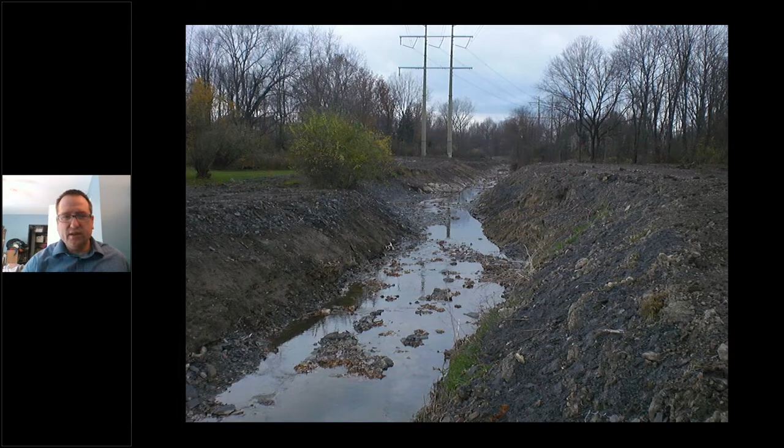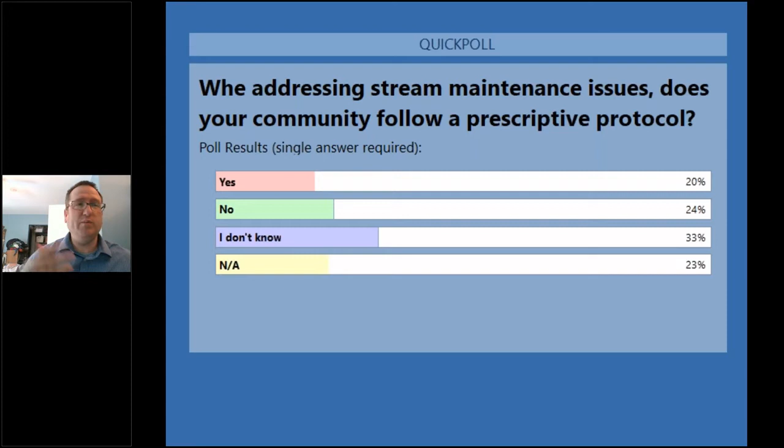One thing I just want to point out, if you are in Northeast Ohio, Cuyahoga County, and some of the neighboring communities, if you're in the service area of the Northeast Ohio Regional Sewer District, they may be handling these stream maintenance issues for you in some capacity as part of their stormwater program, but they won't necessarily handle everything in the communities. A lot of the headwater streams are still the responsibility of those communities.

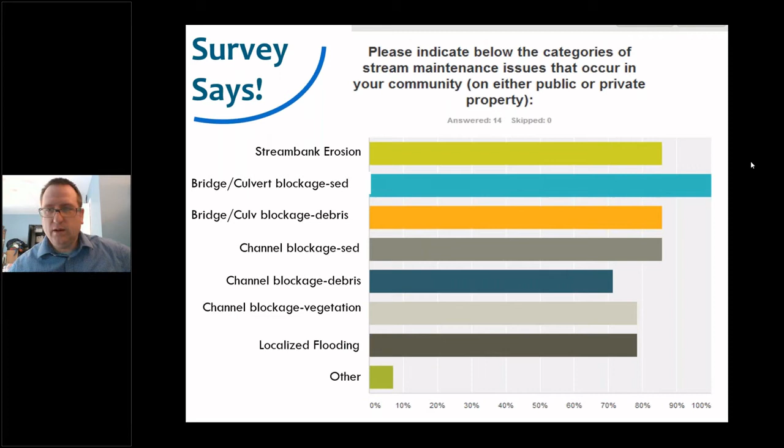What's your approach to stream maintenance or complaints on private property? That's a lot of the issue - many of these issues occur on private property, and that can be tricky for communities to handle. About two-thirds said it was a property owner responsibility. I like that - I think that would make everybody here happy. None said it was the community's responsibility.

Other situations though, it's rarely just a black and white, cut and dry situation. A lot of communities would address it if there was a threat to public infrastructure like sewer lines or roads. The community might address it if they have some sort of easement in that area for infrastructure or for a drainage easement. Others, the community provides advice only. Some would address it if it's a threat to private infrastructure, or other reasons.

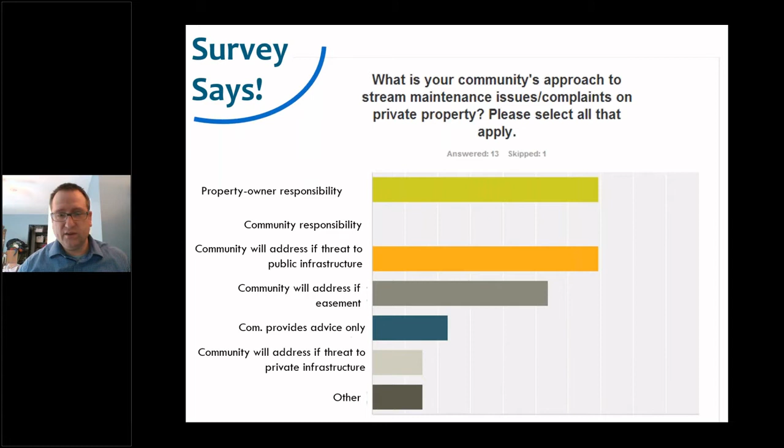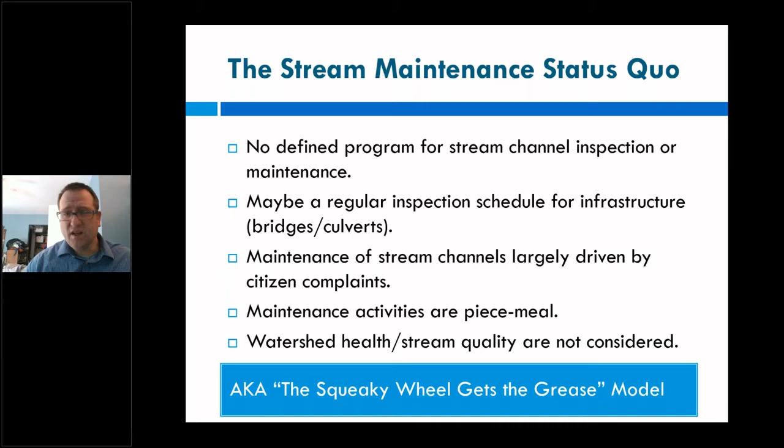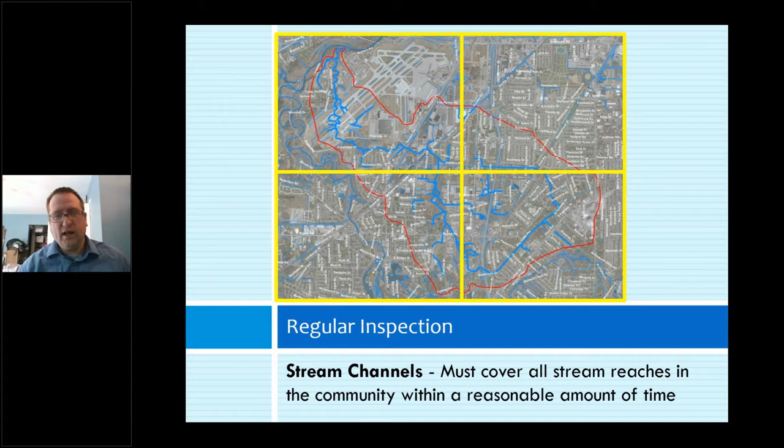So what do you look for when you're doing an inspection? Well, the kind of things we note here is streambank erosion, and not only is it eroding, but is it threatening any infrastructure? Is it impacting anything downstream? Is that sediment clogging a road crossing of any kind?

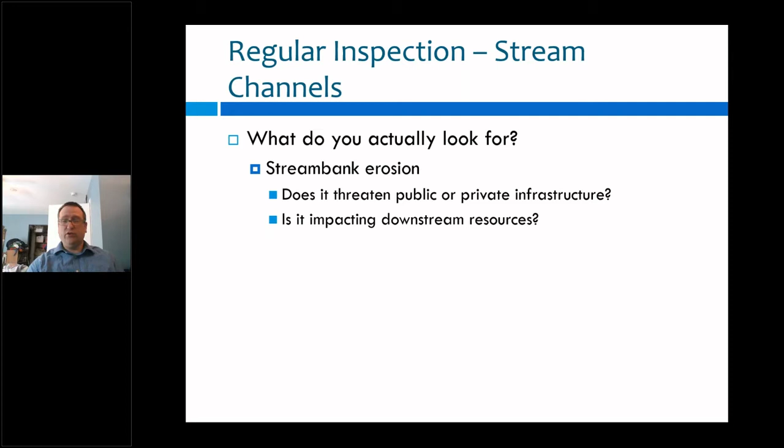Obviously, you're looking for debris jams, dead and severely leaning trees, low-hanging branches. And really, those low-hanging branches, that's only an issue in an area where you see they're catching something, or really low-hanging branches that are obviously going to impede flow or catch debris in a larger storm event.

Sediment deposits, and I've mentioned here especially mid-channel bars—that's like an island in the middle of the stream channel. That's a really clear sign that the channel is not stable and is migrating, moving around a lot. And obviously that's pushing flow out to the stream banks.

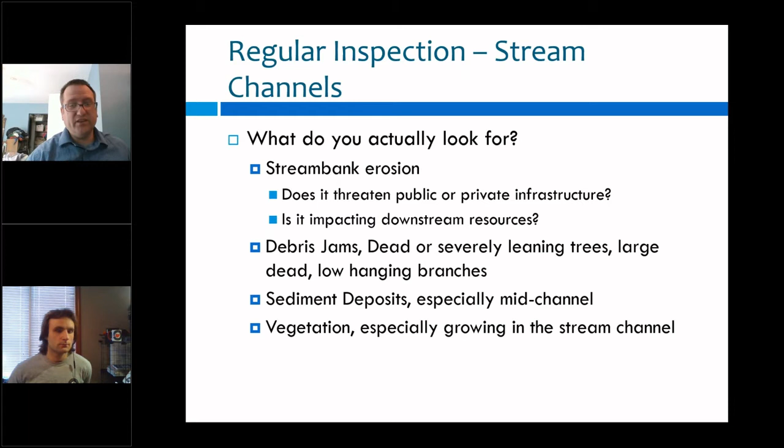Vegetation, especially if it's growing in the stream channel—a lot of times on those mid-channel bars you'll have that vegetation, that's just another sign. You want vegetation next to the channel, but in the channel, that can be an issue.

And then you want a standardized method to rate severity. We often use what we call the Bank Erosion Hazard Index. That's a little more scientific. It doesn't have to be that bad, but the important thing is that everybody doing these inspections is rating things the same way. So you might go out once or twice a year, everyone together, to say, hey, we're calling this a 3 because it's this high and it's undercut or something. As long as it's standardized and everybody's rating it the same, or maybe it's rated more severe if it's next to infrastructure or things like that. You just need a standardized way to handle those kinds of things.

Jared, we have a question for you. When you do stream inspections, do you access private property or just view stream sections from public infrastructure?

Yeah, so ideally you're accessing private property. Now, depending on your agency and your own protocols, that's definitely something you need to look at. When we've done stream inspections on private property previously, we first tried sending out mailers to people who live along the stream asking them to respond and give us permission, but we got such a low response rate that we started doing something where we say we'll be walking the stream between these dates, and if you do not want us to access your property, let us know, here's how to respond. We'd get a few people respond, so we'd make sure to avoid those properties.

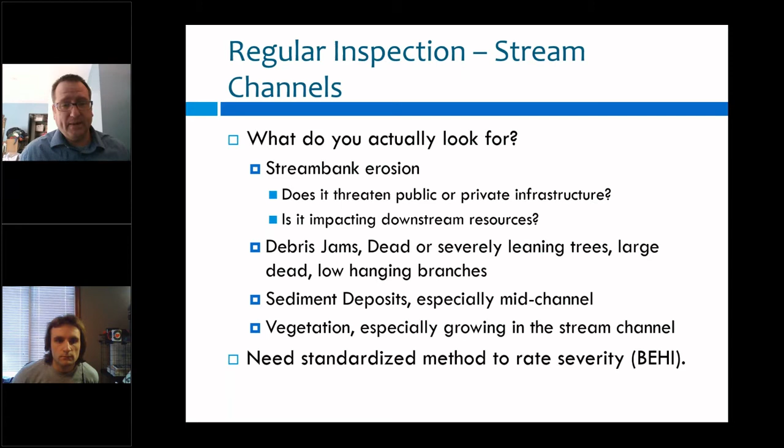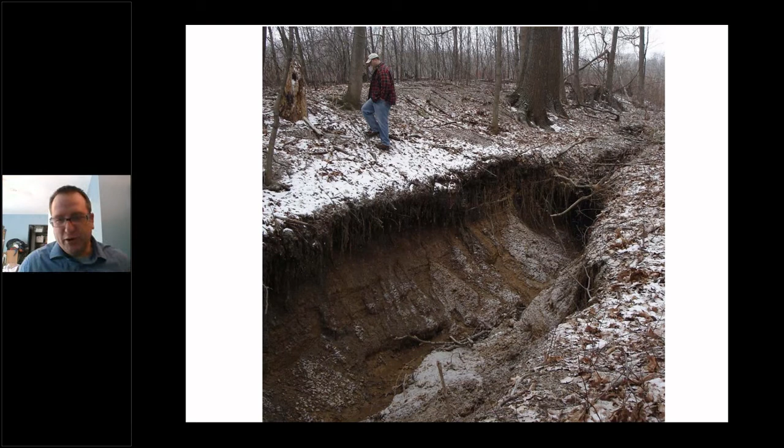Again, the debris blockages, these trees leaning across the stream, kind of this rotation leading to slope failure. The problem with these, it's not just blocking the stream channel, but they're pulling the slope down into it with them.

So these are kind of things you'd be looking for if you're doing your stream inspections. You're not just looking at the stream channel, you're also looking at bridges and culverts. This may be something where yes, you want to do it on a regular basis, especially to note sediment and things like that, but might want to do some post-storm inspections as well.

If it's something severe like pictured there, somebody's going to let you know about it. It's not going to be a mystery, but there could be different blockages that aren't quite that severe, that aren't as obvious from the road, that could start to cause issues if you're not in there taking a look on a regular basis.

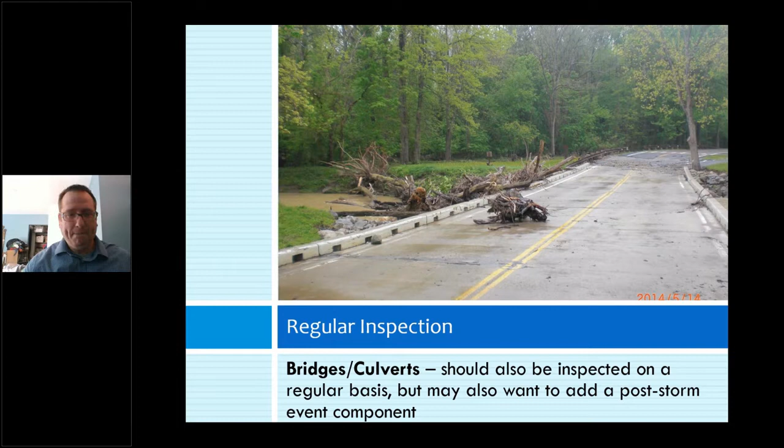So what do you look for on your culvert and bridge inspections? Look for sediment blockages and filling in the channel. You might note, is this mostly sand here, or are these large boulders or cobble sized pieces? Also any deposits immediately downstream of the culverts, or upstream, that could indicate different issues.

Debris, woody or otherwise, lawn equipment, patio furniture, that kind of thing you get in there sometimes. Shopping carts, we have a fair number of those in some of our streams around Cleveland.

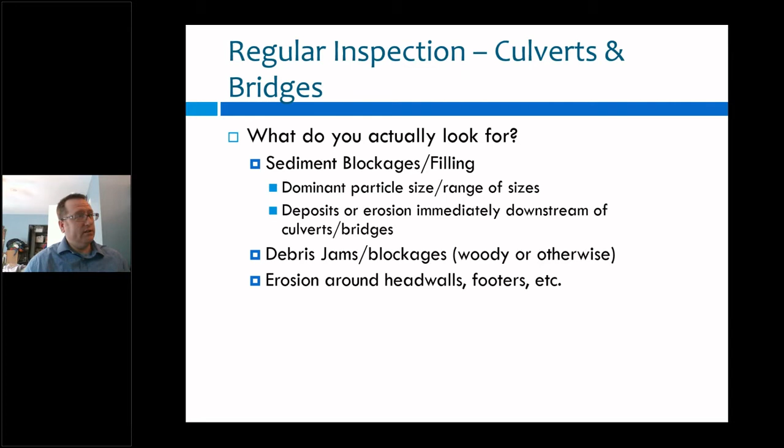Then you look at erosion around headwalls and footers. So when you get some of these blockages, you start to get eddies downstream or upstream of these crossings, especially with the culverts, and that can cause erosion where it swirls back around and starts to erode around headwalls and things like that.

And then again, how are you going to rate the severity of these? You don't have to use the exact things that we recommend. In the manual, it has some tables, some forms almost you could use. You're certainly free to use those, but really the most important thing is everybody's doing it the same way, doing these inspections. So are you looking at how much of the cross-sectional area of a bridge or culvert is filled with this sediment?

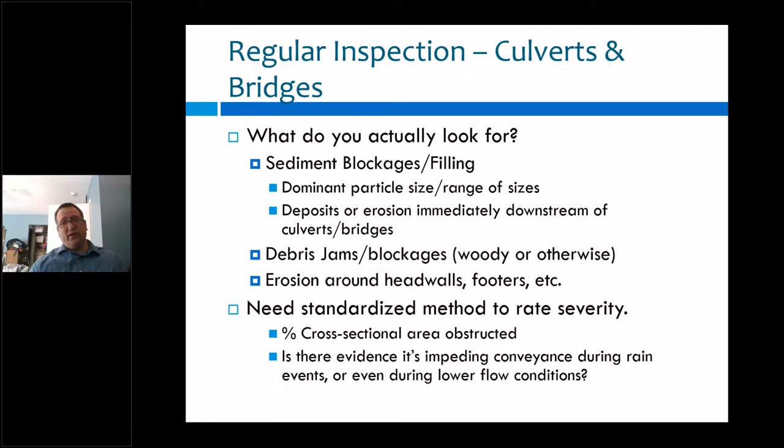So like I said, the most important thing is you need a standardized method to rate severity. So you need regular staff training. And training's not even the right word, but just consensus, making sure everybody's scoring things and seeing things the same way.

The legal issues about inspections on private property, like I said, that's a good one for your law department to see if you can get away with what we do, where we kind of send the thing and ask them to opt out instead of opt in. Or if you just need a general announcement about what your legal authority is as far as accessing private property.

But the regular inspection does allow for a holistic or prioritized approach. So once you can rate these, and you've inspected them and have a rating for the severity of the condition, you can prioritize what you want to do and where to do it, but it also gives you something when a resident calls.

And says, I got this problem, this is blocked, or I got this erosion. You can say yes, we're aware of that, but the severity of your blockage is only a 2 out of 5, and we're dealing with these others that are 4 out of 5 first, or something like that.

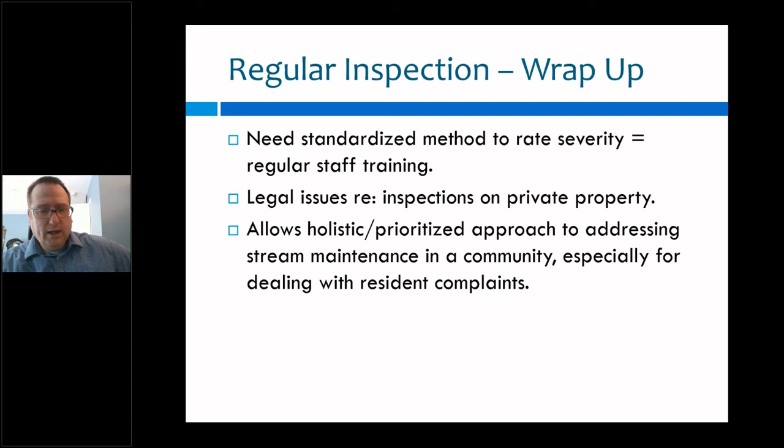Moving along here, let's get to the part about making it stream friendly or watershed friendly, or as I say, at least less unfriendly. This is how we see it after working in watershed management for a long time: the eternal conflict here is conveyance and drainage versus everything else.

The paradigm of municipal engineering from the 50s through the 80s and 90s was really to get water off the landscape as quickly as possible and move it along so that we don't have flooding or water sitting there. That's great, and we've done a fairly good job of that. The problem is we've almost done too good a job, so water gets moved downstream and drains through storm drains faster than it would in a natural situation.

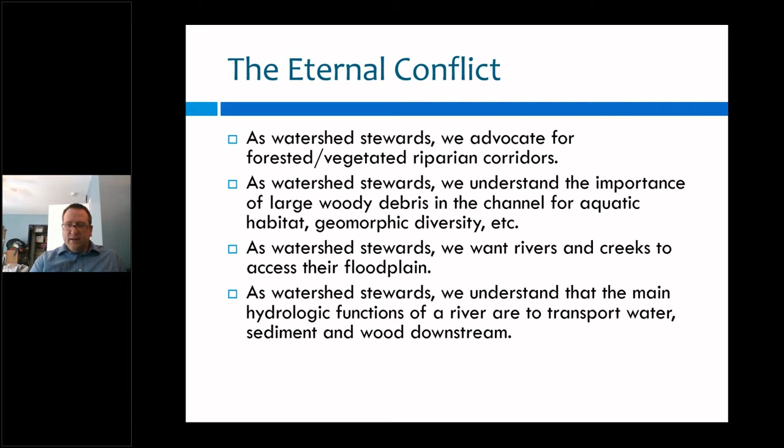However, as municipal officials and owners of infrastructure, these often sound horrible - like, what? We want woody debris in the stream channel? Are you kidding me? So we'll talk about some things we can do to meet both the conveyance goal and the healthy stream channel issues.

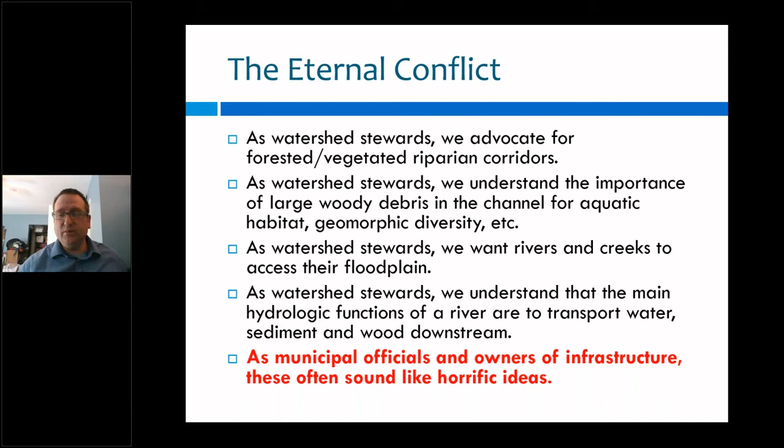So, some main points on which we can all agree: sediment and woody debris at culverts and bridges needs to be removed. That's obviously an issue - it's not going to do anything for anybody as far as conveyance, and it can actually cause issues with fish passage and other aquatic animals being able to move upstream. But there are ways to do this.

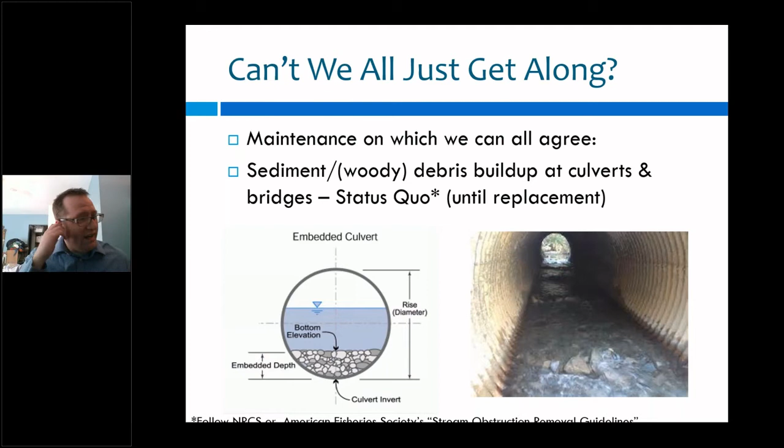For some of these culverts, we really like to have embedded culverts where you have a riffle almost running through, providing habitat and places for critters to hide and move through the system. But if you get blockages, it's got to be designed for that. If this culvert was designed so the whole thing needs to be conveying water or it'll back up, then you don't have room for this. So you have to design to allow for these kinds of things. When removing debris from channels, there's good guidance from the American Fisheries Society and the Natural Resources Conservation Service on how to do that. I'll send that out in a follow-up email.

Related to riparian corridors and vegetation management, you do want to remove fallen or severely leaning trees if they're causing or could cause an issue. A lot of this depends on location in the stream channel. If it's just out in the woods, not impacting anything, there's no reason to do anything. But if it could impact infrastructure or is close to a road crossing, you may want to remove severely leaning or fallen trees, but leave the stumps intact, because those root wads help stabilize the stream bank and hold the soil together even after the tree is dead. Removing that weight of the leaning trunk keeps it from pulling the slope down with it.

You can trim low hanging dead branches in extreme situations, where there are known conveyance issues impacting infrastructure. In a natural setting, you would never go out and do that. If only bridges or large box culverts are downstream, you can cut logs small so they pass through and leave them in the flood channel or floodplain. I can't emphasize enough how good that woody debris is for stream health. But if it's really clogging culverts, you'd want to take it out of the floodplain if removed.

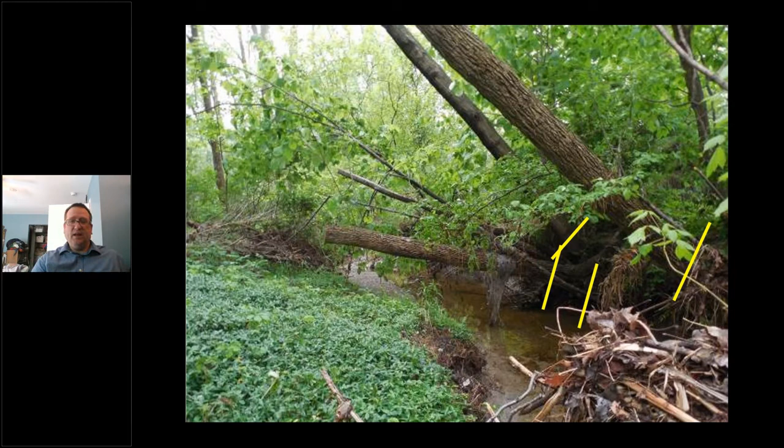So, common stream problems and solutions. We're going to talk about stream bank erosion, different ways to address it, debris and log jams, and we'll discuss flooding - that's a whole larger issue if it's not caused by a localized blockage. But these are just different problems we see a lot.

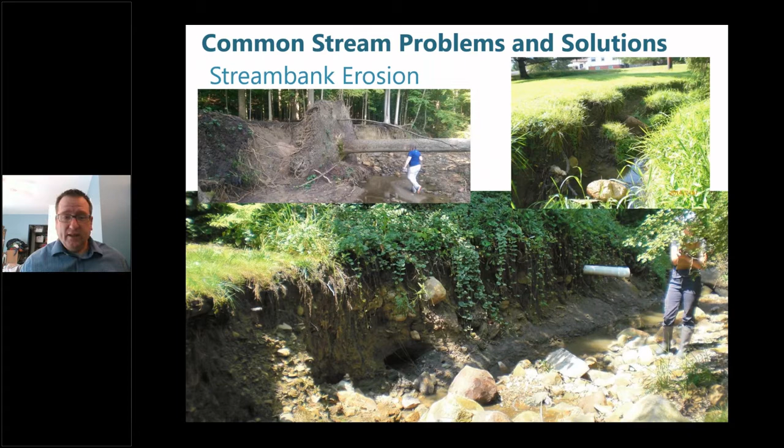More energy equals more erosion. Just to see some examples of that—people a lot of times say, oh, I've got this eroding stream bank, I should throw some concrete slabs on top of it, my brother-in-law has a construction company, get me all these slabs. Well, that's not what we want to do.

As I mentioned, the vegetation, one of the benefits is it reduces the velocities, that near-bank velocity that you'd get on the stream channel. So it helps reduce that erosion in addition to holding that in.

Also, these flat pieces in a big flow are just going to mobilize easily, the way the water will pick those up. We find those scattered downstream, causing additional issues because it's kicking water in different directions. Also, this just moves the problem downstream, because it might give you a temporary fix at this location, but you're just bouncing that flow and redirecting that velocity downstream. So now your neighbor is going to have an erosion problem.

So some solutions for streambank erosion: leave a vegetated buffer, a streamside forest, whatever you want to call it. Riparian buffer in some places has a bad name, but streamside forest is something you can go with. You get that tree canopy, the understory, the roots holding everything together. It has a lot of benefits for both wildlife and stream health and stability.

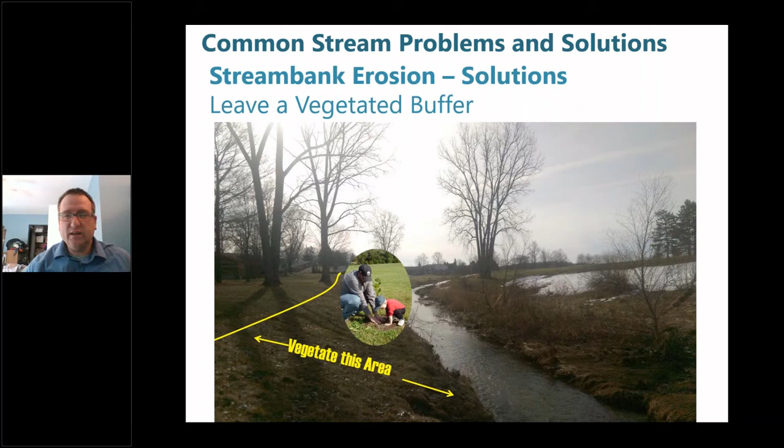So you want to revegetate that area with trees. We really like woody vegetation where we can, because those roots are really good for holding in the stream banks. But sometimes that's not always appropriate—you can have more just vegetated, a meadow or prairie, something like that. Those native plants, those native wildflowers, are still going to have deep, dense root systems that help you out better than just a mowed lawn would.

Some other solutions for erosion involve bioengineering. Live stakes are cuttings of things like sycamores, some of the different dogwoods, willows—a whole range of species that will root from these cuttings. As long as they're installed so that the base is in the water table once installed, right next to the stream channel, they will sprout, grow, and root, providing stability.

Again, it's the roots providing stability, but it's also the branches and eventually the leaves helping reduce the velocity right next to the stream bank. So you're reducing the erosion that way as well.

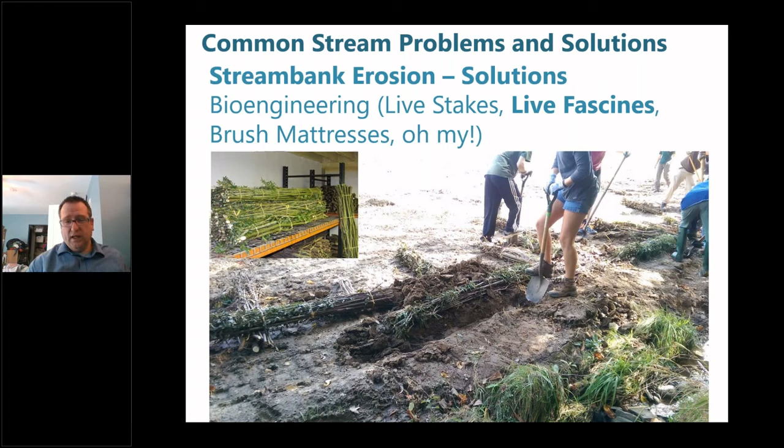Live fascines are another thing we use. These are bundles—you can see it in the picture—of basically the same materials used for live stakes, the same species, planted and installed along the stream channel where they'll root together. Often you use the live stakes to install them in place and hold them there. You install these either along the stream, right above the stream bed, especially on steeper situations, or as a combination of live stakes and fascines, like here, fascines along the water, live stakes holding some matting above it. You can see how you would install those.

It's really simple, and they're cheap too—the live stakes are a couple bucks a piece. So you can afford to throw a bunch of them in there and see how that works for you. Now, it's not instantaneous—unlike concrete slabs, where you feel like you'll get an instant benefit, with these you've got to wait for them to root. It might take a season or two to get them established. Realistically, we're installing these between about October and March, while they're dormant, is when you want to be installing those.

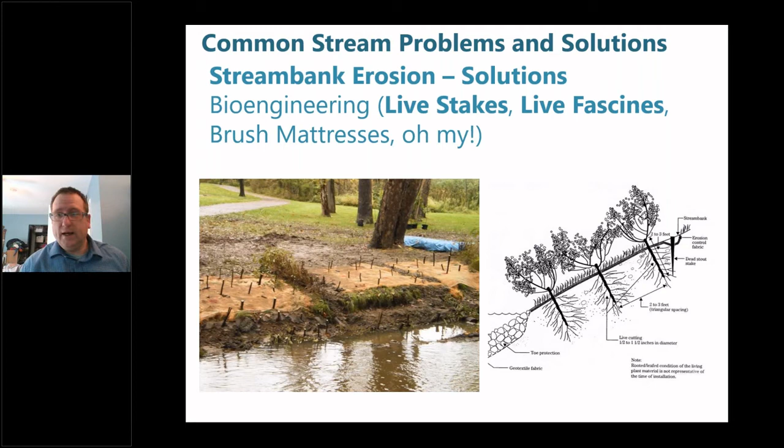Another combination of this is brush mattresses, where you're basically laying these same stake materials down along the stream bank, then tying them down with stakes and twine.

You'd cover that with soil, on top of those, and make sure it's staying wet. The bottoms of these branches are oriented so the base is down in the water or close to the water line, so they can access that water to grow. These will root into the soil along the branches to provide good coverage.

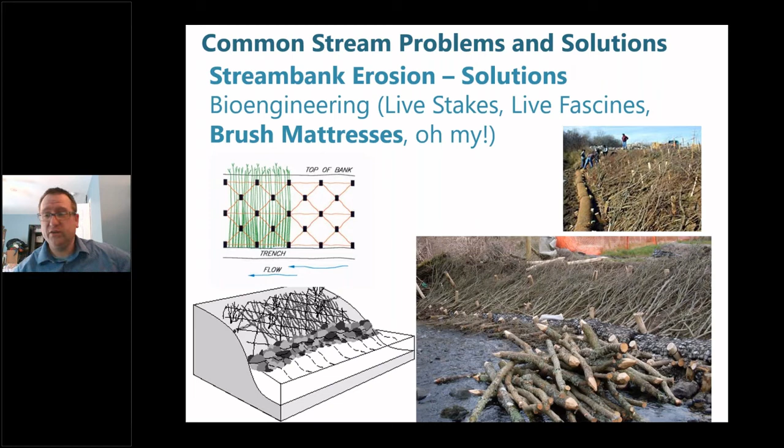The other benefit is you get some coverage immediately from the branches laying along the stream bank. Now, a lot of times you end up with vertical stream banks. If you have the space and equipment to do it, grading that out to make a more gradual slope is really the best solution. It's understood you don't always have the opportunity to do that, from an equipment, access, and cost standpoint. But it is one thing you can do, especially in those severe steep stream banks.

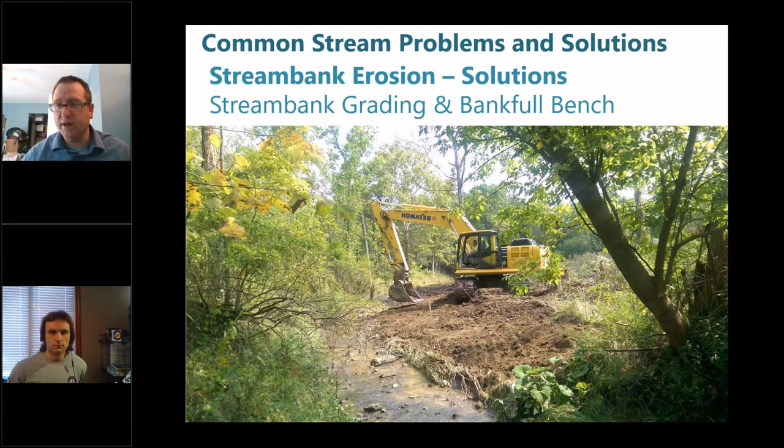And finally, if you're doing grading. We have a few more questions.

Is permitting or coordination from the Army Corps or Ohio EPA needed to perform these common stream solutions? I'll touch on that later in the presentation. We have one more question.

How do you prevent mattresses from being swept away in large rain events? It's always a risk. Those are anchored using posts and twine or similar rope to anchor them down and tie them. It's no guarantee, like if you get one of those huge rain events afterwards, but they are being anchored in place, not just laid up on the stream bank.

We'll talk about permitting closer to the end of the presentation. So, stream bank grading and bankfull bench.

If you're going to be grading, sometimes it's great to make, if you have the space, a kind of little floodplain. If you're familiar with ditch maintenance and design in the more agricultural areas of the state, that's similar to a two-stage ditch, where the water can get up there and dissipate energy and flow. Usually under most flow conditions it's just in the narrower channel, but it gives you a small floodplain to work with during larger storms.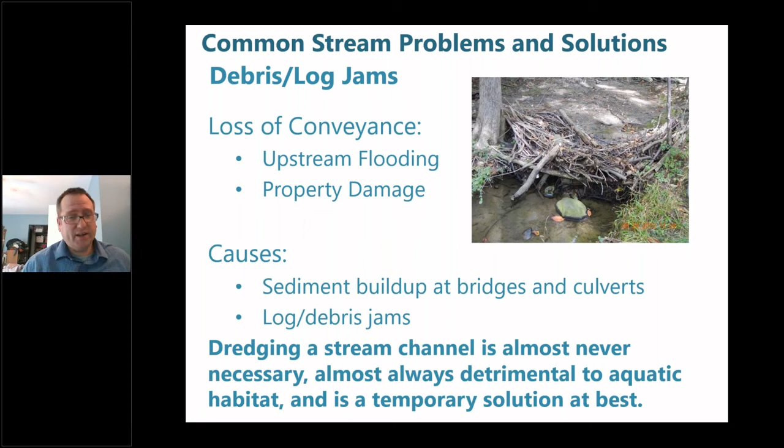Think back to that first picture that kind of inspired all this - that's almost never the answer. It really causes a lot of problems and instabilities because you're tearing up roots, tearing up a natural, often stable system, what's left of a stable system, to do that. But there is targeted removal where you may need to take out a debris jam or log jam, not the stream channel itself.

If you're inspecting these, things you'd want to note are: does this span the entire width of the stream channel, significantly impeding flow? Again, they're only problems if you're threatening infrastructure. Otherwise, they can be extremely beneficial.

That woody debris is very important in the stream system for both chemical cycling - it provides a lot of carbon for the system - and also stability. If it's getting backed up, I'll show it in this next picture.

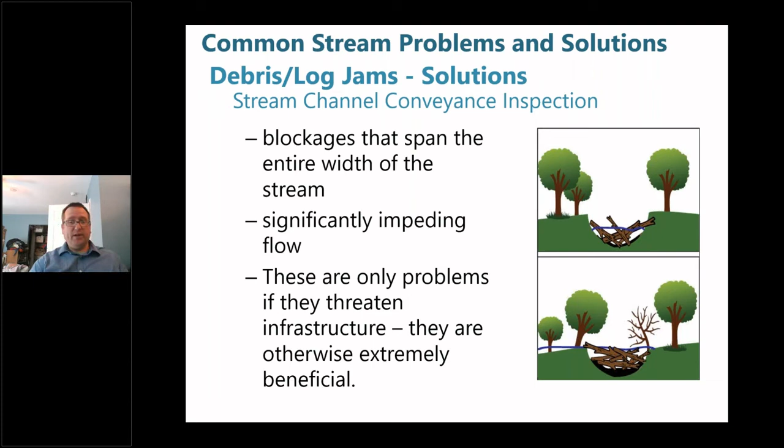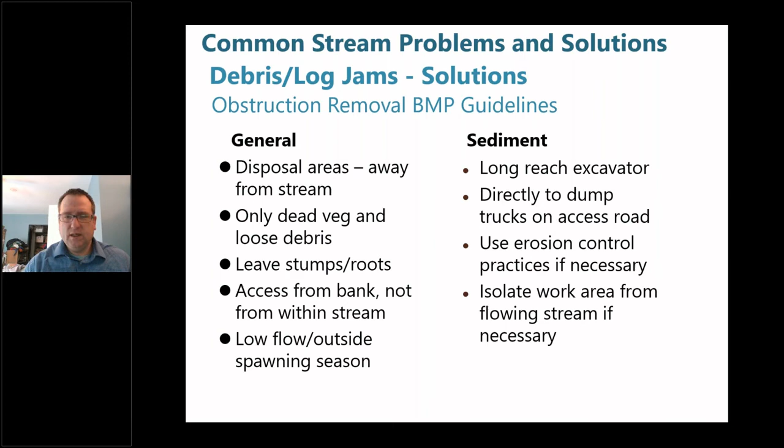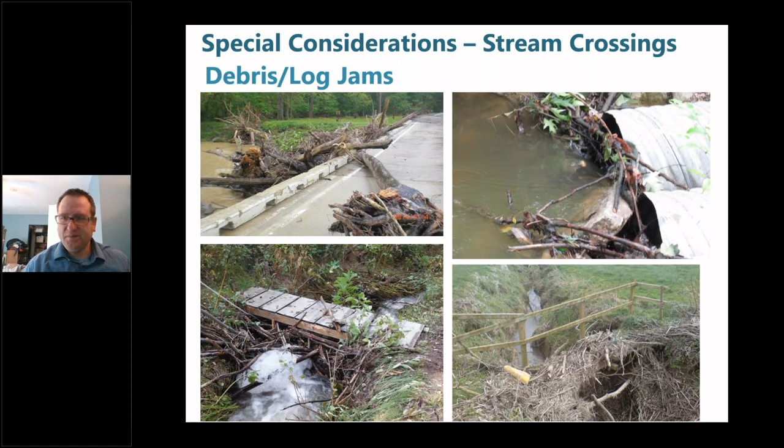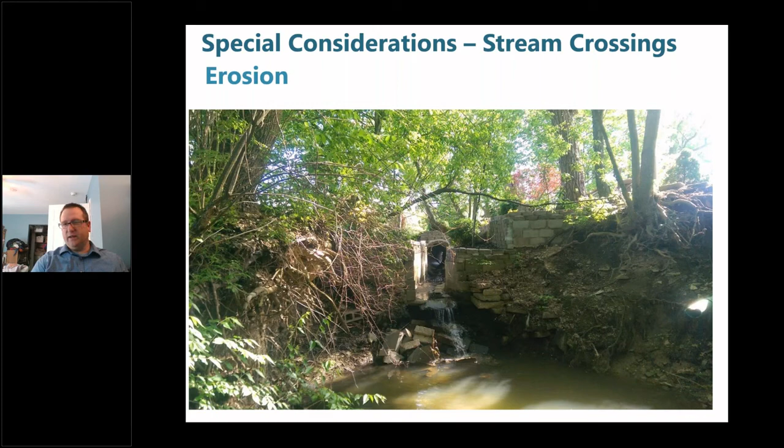Another thing to consider at stream crossings is erosion. You can see in the middle of the picture there's a culvert. This is just somebody's driveway culvert, so it's a fairly small channel, but when they installed it, the bottom of the culvert area was maybe a foot drop down from the bottom of the stream channel. Now you see the amount of erosion. There's been some upstream development that maybe isn't being properly controlled by stormwater control measures, but I think the culvert is also probably undersized to start with. It's just getting a lot of pressure coming out of that culvert during rain events.

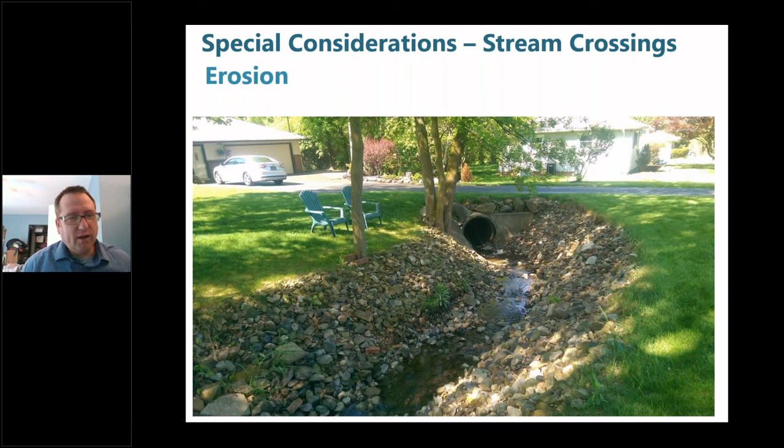This is that channel upstream, flowing into that. You can see it's a pretty small stream most of the time, but due to the undersized nature of the culvert—and I don't know why people do things sometimes—this culvert upstream coming under the road is about twice the size of the culvert going under the driveway. So that's obviously part of the problem as well.

Now when we get to flooding, this can be an issue at stream crossings if you get backups. Maybe you have a backup stream downstream causing flooding, especially if you've got a road or bridge that's lower, or a ford or something like that. So that's another issue at stream crossings.

Now, if it's a regional flooding kind of issue, just cleaning out all your drains and culverts isn't necessarily going to solve that, if there are other issues at play. But sometimes these can be caused by backups, so just something to keep in mind.

When considering stream crossings, some planning and design recommendations: obviously avoid or minimize crossings. The fewer crossings you have, the fewer chances for issues to pop up. This goes way back to the planning stage when you're designing subdivisions or things like that.

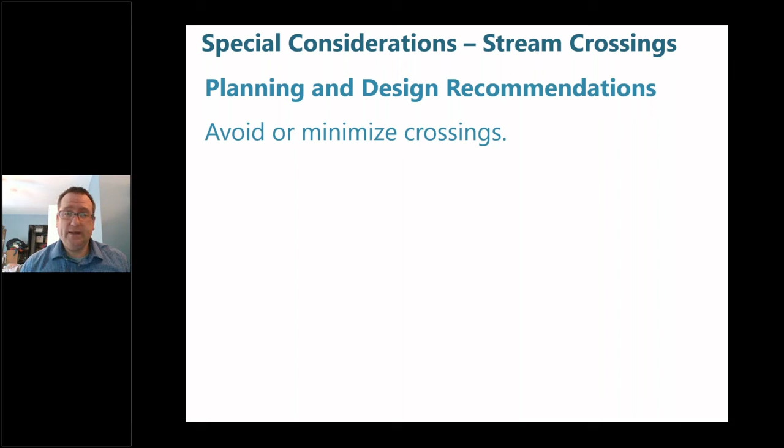Bridges are preferred over culverts in most situations. There's more leeway as far as passing storm flows—a little better at passing that, and also not disrupting the stream bed, sediment, and habitat there.

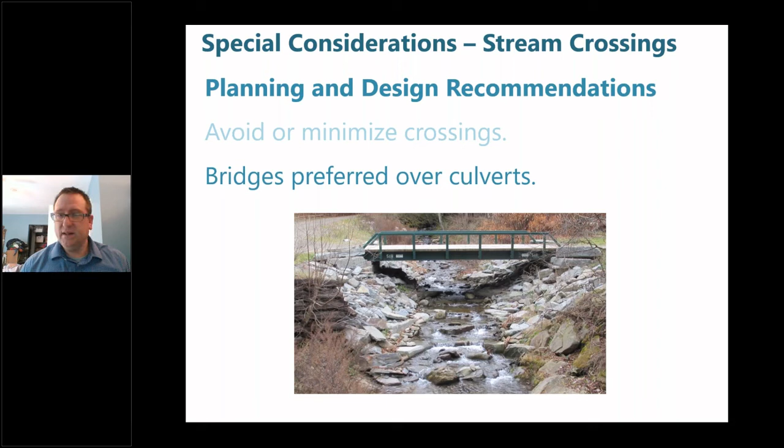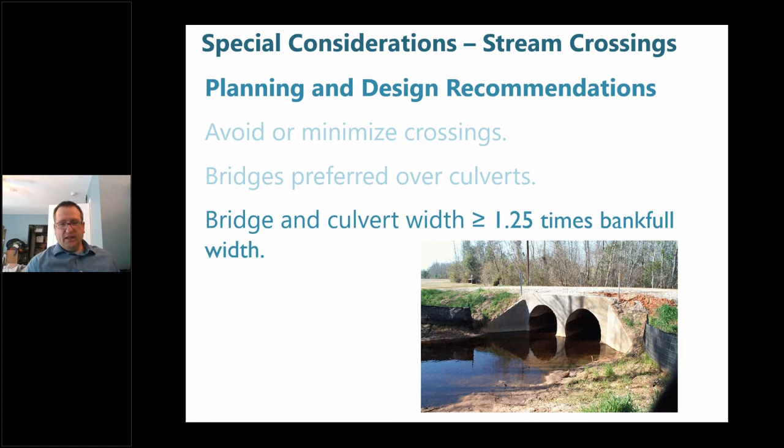Bridge and culvert width should be greater than the minimum, like 1 1/4 times the bank full width. This isn't a good example of that—you can even see under low flow conditions that the water is narrower than the stream channel. That's a good way to tell automatically that there will be problems either upstream or downstream because of that.

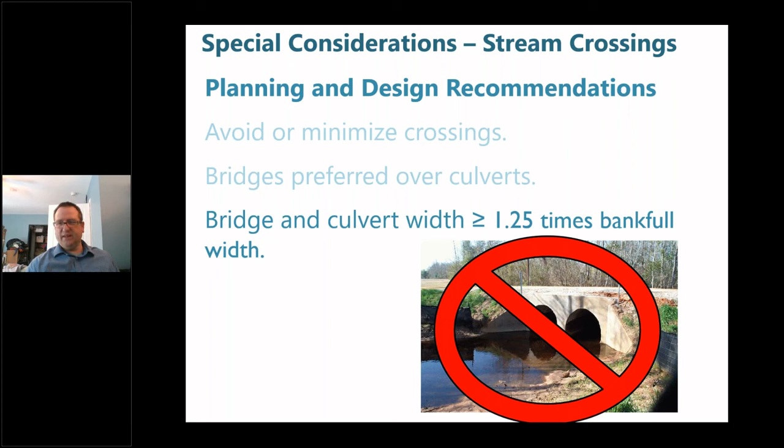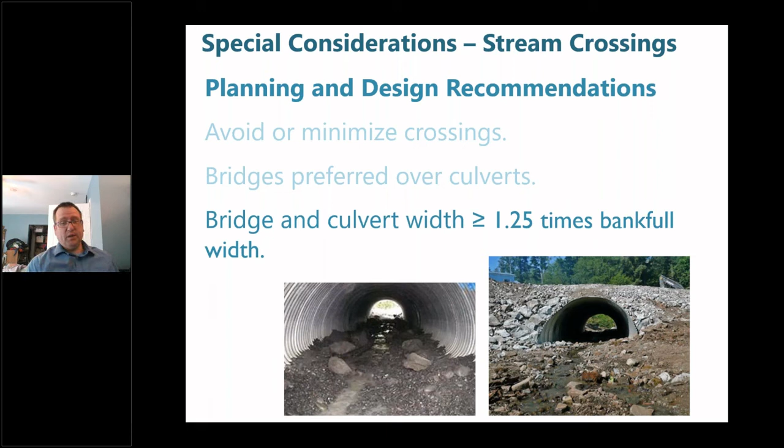We talked about some culverts designed to pass sediment—there was a question about that earlier. There are some ways to do that, but it has to be designed that way, to pass that flow through there including the sediment that's in there. So that volume has to be accounted for.

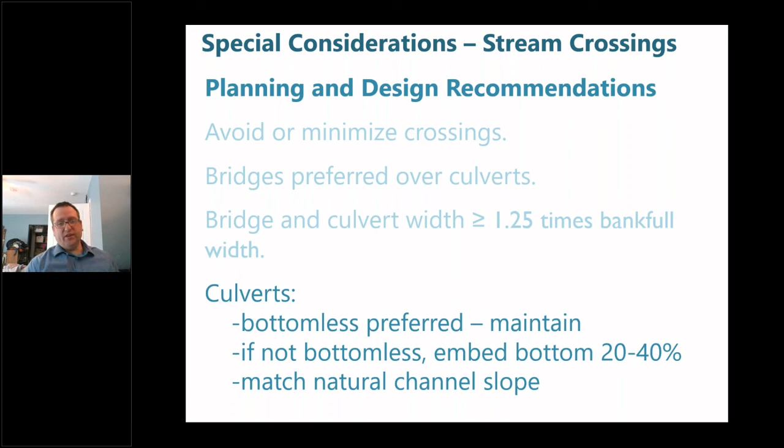Bottomless culverts would be preferred. If not bottomless, embed the bottom 20 to 40 percent, design for it, and match the natural channel slope. We get a lot of these too, where it's just a flat, almost near-flat culvert going across that doesn't match the slope of the channel. Just some examples of that.

There are lots of good guidelines out there for ways to do this if you look it up. You have a source here: culvert criteria for fish passage. Just kind of thinking about some of these issues.

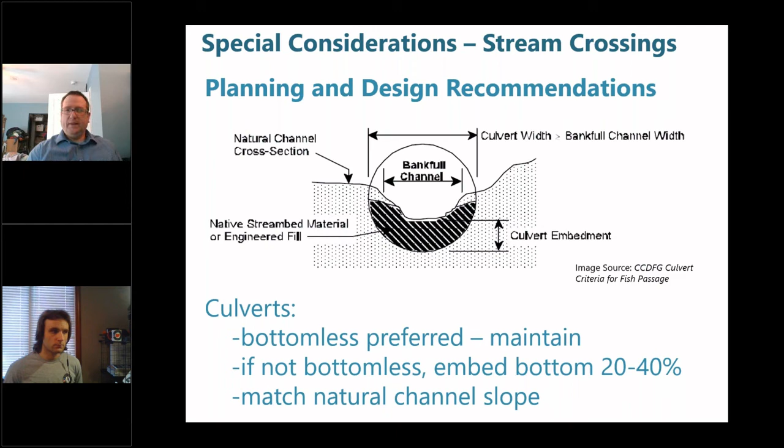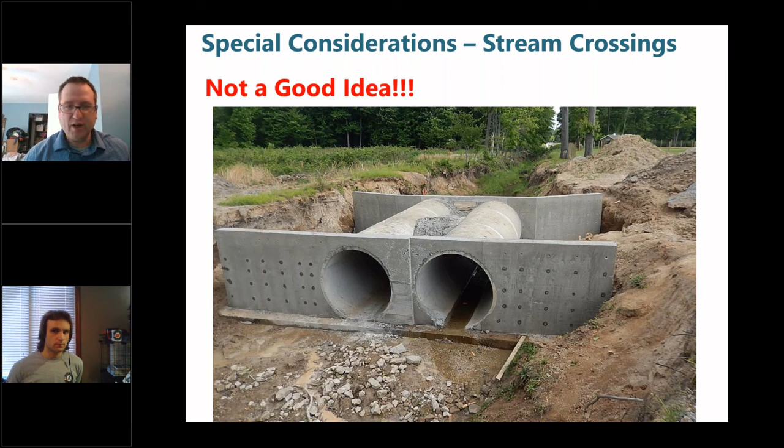The channel erosion was happening before they put this in, but it's still going to have some problems. I'll have to go back and take a picture of that now and see how it looks.

If a repair is found needed on private property, who performs the work? For example, a retaining wall failing that is protecting a private driveway.

That really depends on the program in your community. Some communities might say, we will do that work. I'm not a lawyer, but generally the person who owns the property is responsible for any maintenance they want performed on it. That's the baseline with Ohio water law, pending other agreements or things like that, but that is the baseline situation.

Unless some communities have said, okay, we want to start a program because this is definitely an issue, or if it's threatening public infrastructure or even private infrastructure, maybe there are ways they can help—ranging from guidance and technical assistance to providing something. But the baseline is the property owner is responsible for any maintenance. It doesn't mean they have to do maintenance on it—if it's just threatening their driveway and they want to let it go, they can. But if they want something done, they'd be responsible for that.

All right, so I told you we'd get to the permit situations for this.

For a lot of this, the question came up specifically about bioengineering and things like that. It really depends on how much filling you're doing. In the manual, we laid out the different nationwide permits and things that are necessary. Just to orient you with the columns: the activity, and which nationwide permit that is.

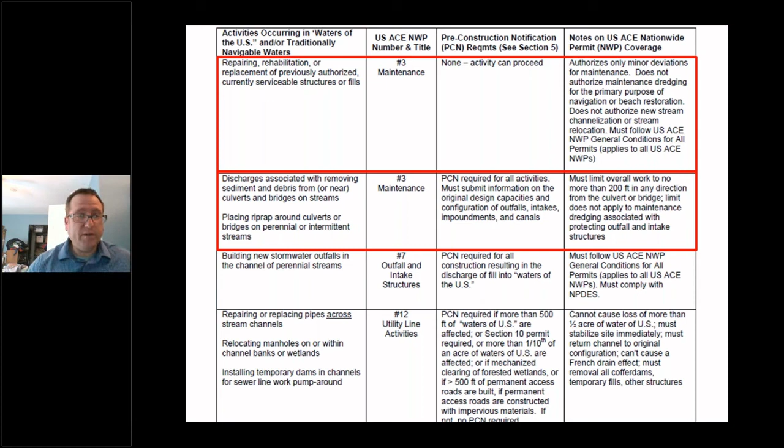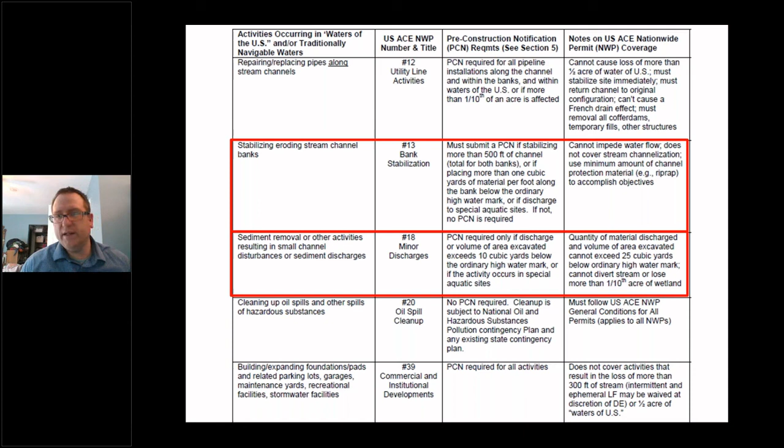But for instance, removing limbs, waste, and debris from stream channels, as long as it's dead, you don't need anything. The condition is you need to lift it out without entering the stream channel. So anytime you're getting equipment like tracks or wheels into the stream channel, you need to call Army Corps to verify any of this.

These in the manual are based on the nationwide permits, an earlier version. In the handout section, I have a summary table with the more recent, up-to-date current nationwide permits information than what's in the manual. I went through them, and there's not really any changes for the kind of things we're talking about for the maintenance program that I noticed, but I wanted to make sure you had the most up-to-date versions.

So that other handout is a summary table of all nationwide permits and when you would need to do the pre-construction notification, which is kind of what we call it when people say get a permit - that's what they mean.